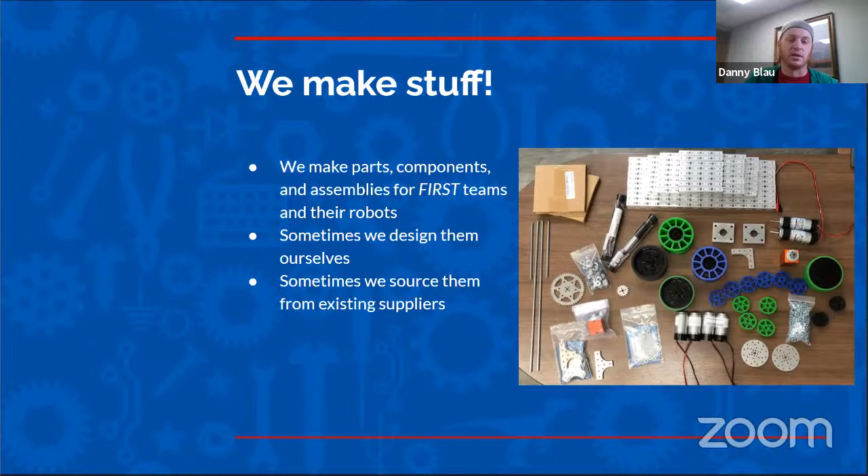So where are we located? We are in Kokomo, Indiana, just a short 8,399 kilometers from Bucharest. We do some manufacturing in-house here at our facility.

We do a good chunk of our manufacturing here in town, at various other vendors and suppliers that we have. Throughout most of the Midwest is where we get the rest of our manufacturing. And we do all of our order fulfillment through our headquarters here in Kokomo, so all of our picking and packing happens here.

For certain regions of the world, we get a little bit of help on order fulfillment, where we can ship one big shipment to a central spot in Romania, and then have it get distributed from there. Or sometimes organizations will put in big orders and help things get distributed that way. We really try to leverage those partnerships and alliances as best we can, to make sure the experience for all of you is as good as it can be.

Our history with FTC started back in 2012, where we started distributing the game pieces for FTC. Then in 2014, that took the next step forward, where we started doing more than just the game piece and really started to do the entirety of the field for the FTC program. That started with the game called Cascade Effect, pictured on the screen there.

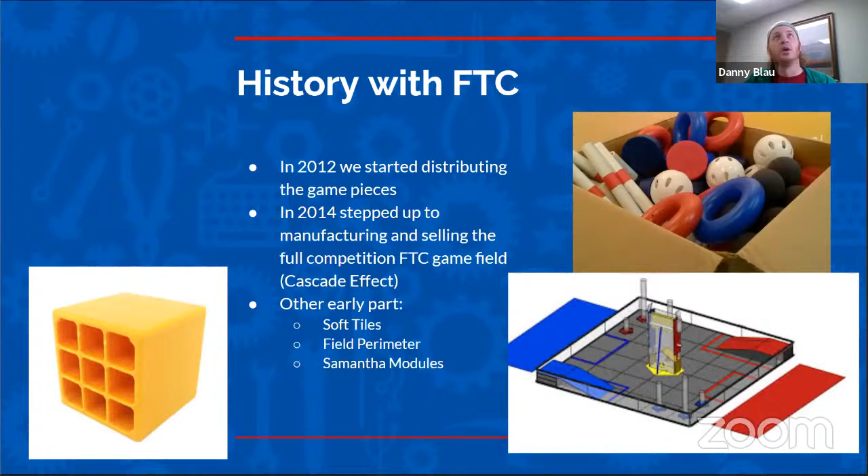Now moving forward into how the game each year gets developed. This is where I have to stop for a quick second and talk about the people that are involved at this point.

There is a game design committee, which is a group of volunteers that is first put together, and they're the ones going through and putting the real concept together. This year it was all about throwing rings and playing frisbee catch with the robot. That game concept and a lot of the decision making that flows from it all comes from the game design committee.

Also involved is FIRST itself. They're walking along with us, step for step, making sure that we're on the right pathway and moving in the right direction. They're the ones that get the final sign off on all the components, to make sure that they're going to be robust enough and the right quality.

And then there's AndyMark. We're working with the game design committee and FIRST on a very routine weekly basis as we go through the game design process. From the start of this process to kickoff is about a year, sometimes a little bit more than a year.

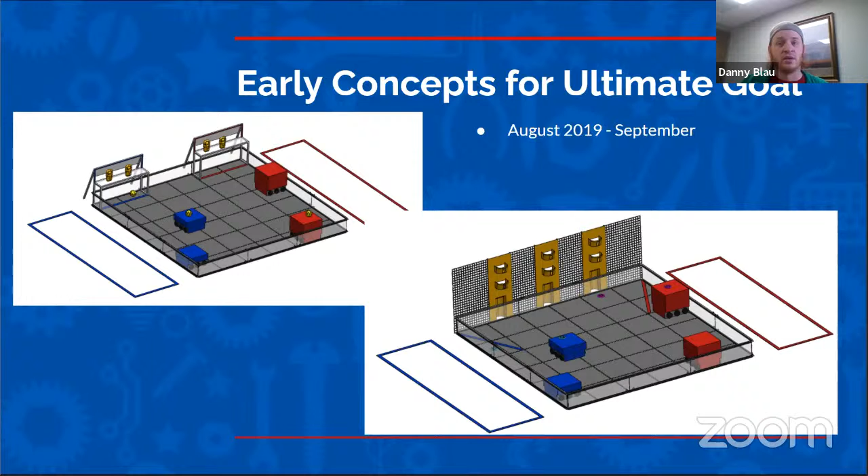So at this early phase, we have a little bit of the idea, but we're trying to explore different ways that the gameplay can work. And then we start getting through some of those evolutions, trying to think of different ways we could play this game.

So we have some different components come into the field here, from almost like a skee ball style ramp, the big orange item there, a ramp where you could either roll on their edge or maybe skip like a stone, game pieces, up those ramps and various things. Just playing with more different variations on the concept.

We also talked about maybe adding a platform and a limbo bar. The limbo bar would have been somewhat reminiscent of what was on the field last year for Skystone, helping robots figure out where they need to shoot from, and maybe putting some barriers in place to do those sort of things. So looking at different concepts like that.

And also then we had the one in the bottom corner where we're like, well, if we turn the goals sideways and you actually have to take maybe more of an odd angle shot, or even see if we can get the game pieces to curl, that might be another way to change up some of the dynamics of the game.

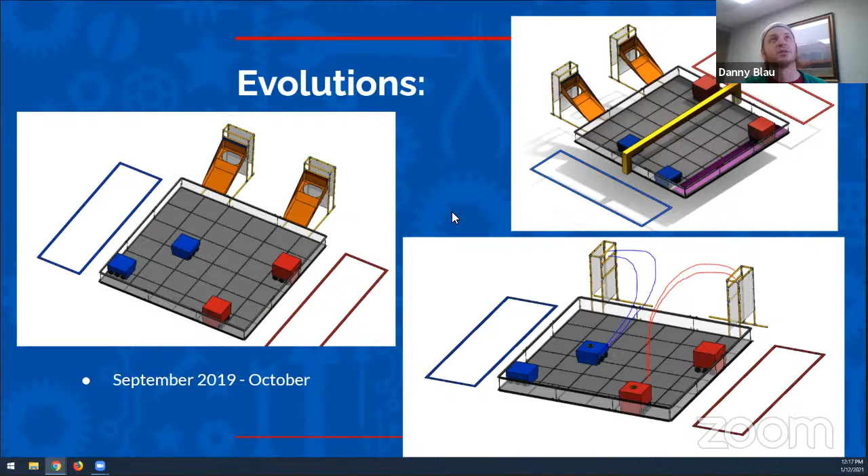Then late October 2019 is sort of the first time that our working model for the game field started to look like the thing it would be at the end. We didn't know this at the time, but it's kind of fun to go backwards and say what's the earliest point that it really looked like that thing we ended up with. For this cycle, late October was when we got to that point where it really started to look like what our finished product was going to be.

At that point, we didn't know exactly how much netting we were going to need in order to be safe, so that if a robot shoots a game piece in a weird direction off towards the human players. We hadn't yet settled on what the game piece was going to be exactly, so we didn't know how much it was going to hurt.

But the tower goals really looked pretty close to how they were going to function in the end. And the central field element, this is very close in functionality to what it was going to be like in the end. We have these same little targets, these same paddles, that robots were going to try to throw game pieces at to knock over.

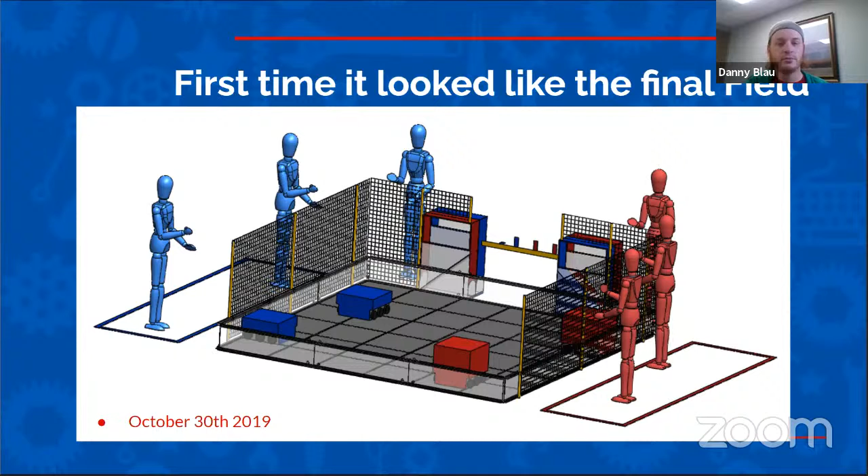All right, so at that point, we kind of got some of the full field to a spot, and we started to dive into the details in November and December. We were playing around with some of the different concepts for what the wobble goals should be. That was something in the gameplay from fairly early on, having these extra sort of goals on the field, and so what should those look like?

As we were going through this process, we were looking at different sizes, should an extra game piece be able to fit on next to the pole, or do we want something like that? We even talked about a smaller version where a game piece would not fit next to the pole, it would fall off. So again, playing with different things.

And then also around this time is when we started working on some prototypes. So this is a 3D printed version of one of the wobble goal bases that we have up here, and we were playing with adding some weights. Adding some weights to the bottom of this so that it helps weigh it down and helps it come back to sitting upright.

And so this one is another print. We have a little bit of a ding here. So as much as we can, we try to do some real practical sort of testing with the prototypes. We take robots, we drive them into things, we bash them around, we bang them up, trying to get them to really replicate what we think robots are going to do when they're playing the game, and make sure our components are going to live up to that.

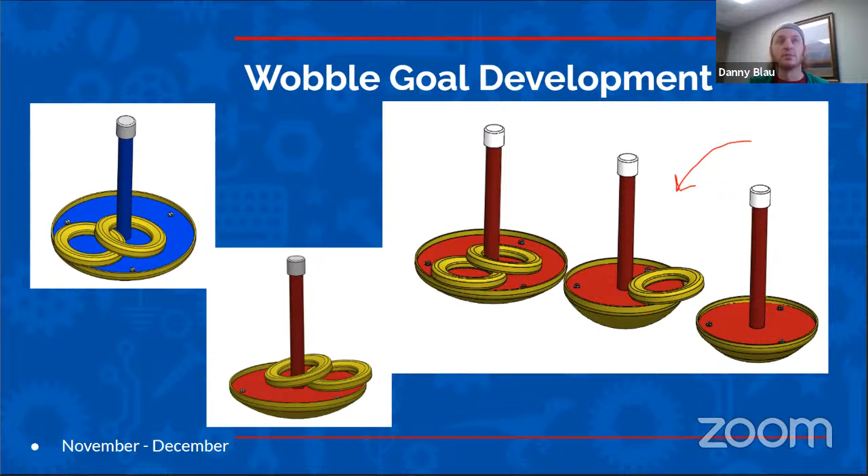So the tower goal went through various stages of evolution. The game design committee knew they wanted the high goal to be harder still compared to the middle goal. So playing with different concepts, it's up high but it's also smaller, and does if you miss to the left or to the right, does that score for the opposite alliance? Having each tower be a goal for multiple, for both different alliances, was part of the game from very early on, and that was something people were fairly excited about.

And so we were kind of going through some of these early renditions, going through not only different concepts but also different manufacturing methodologies. So from more like flat goods on some of the early prototypes or early ideas, to some of the net and pipe work towards the second prototype, and then over to a formed sort of basin part that we could do in multiple colors, that could use several of those with a framework around it, to be another third variation on a different manufacturing method.

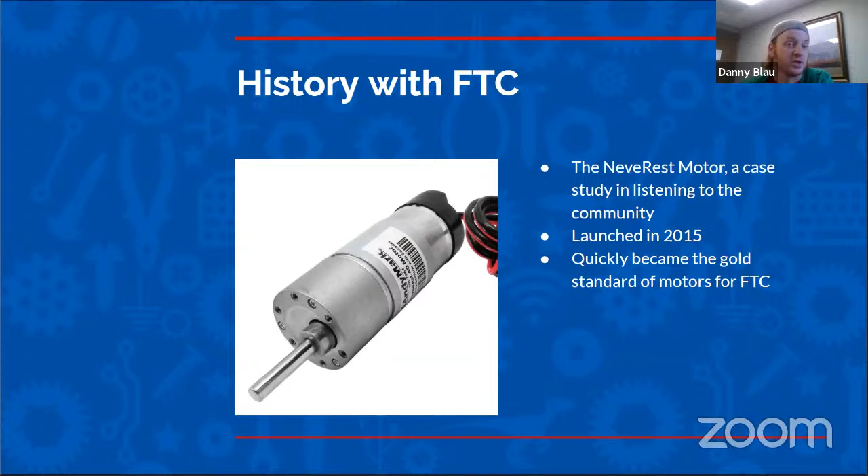And this has been another really, really popular product. People really love how durable these Mecanum wheels are.

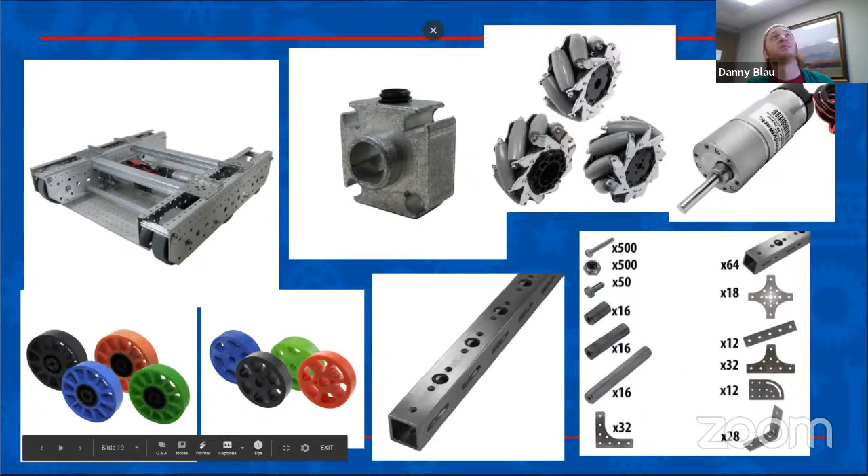So one of the things I wanted to touch on here, do we have any questions that have filtered in? Yes, there are a few questions in the chat.

Oh, lovely, we'll stop that. Okay, so question coming in here: do you choose the season theme, or does FIRST give you the theme?

So that's a great question. FIRST gives us the theme, and I don't know exactly how they develop that theme, how they figure that out. But I do know that they've gotten a lot of really good feedback around having all the programs themed together. So that is a thing that I would suspect will continue to happen moving forward.

From YouTube: how do you deal with metric and imperial parts and fasteners, and sort of cross compatibility? Another really good question.

So typically we do a lot of stuff here at AndyMark with imperial fasteners. On the FRC side, which is a bit of an older product line that we have, basically everything is imperial. All of the sizes, dimensions, hole patterns, everything is all in imperial inches. So it all sort of works together nicely.

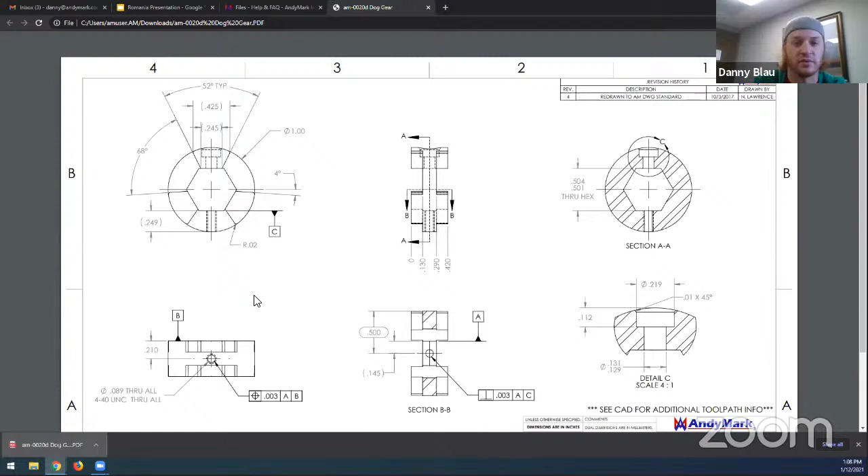In addition to all the CAD files, we also have our PDF drawings, and these are all of our technical drawings. So we have, like, oh goodness - this is one of our components from one of our shifting gearboxes. It's one of our more FRC specific products. But we have the full technical drawing that went over to manufacturing for how to make this part, so that they could get all of the critical dimensions that they need and all those sort of things.

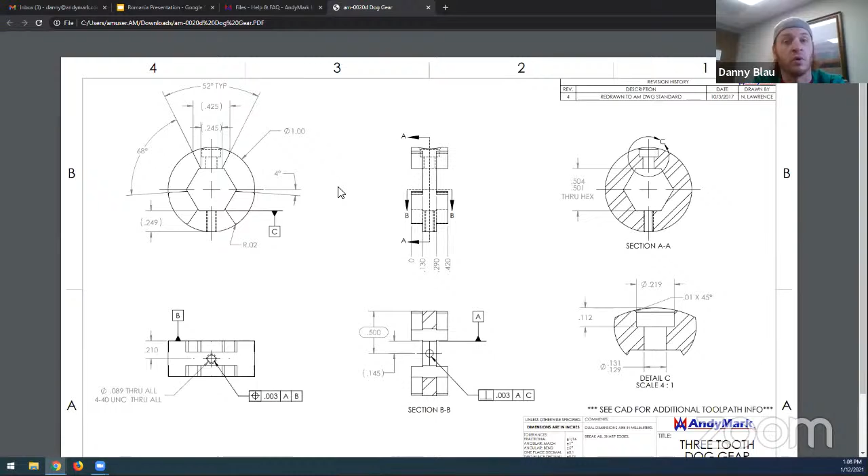And so we have a ton of these CAD drawings up on the website for your reference there. So all of these things are there and ready for your use. And again, search bar here to go through and help find the things that you're looking for.

But we also have a nice long listing, sort of an all-in-one repository for our assembly instructions. So that resources tab is a really nice all-in-one place to get the CAD files, the technical drawings, or the assembly docs that you might be looking for. Additionally to that, the search bar functionality is really rather good.